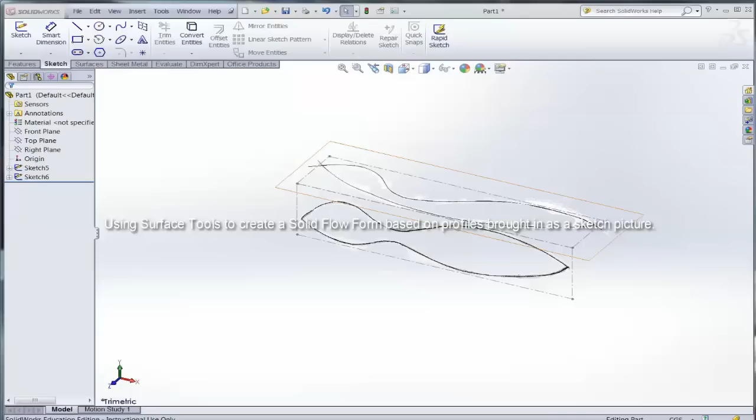Alright, we're going to use the surface tools to create a solid flow form based on our sketch pictures that we've brought in. Here are our two sketch pictures we did in our last video, and I'm going to start a new sketch on a plane that's in the same area as the sketch picture I brought in, but it's going to be separate from the sketch image.

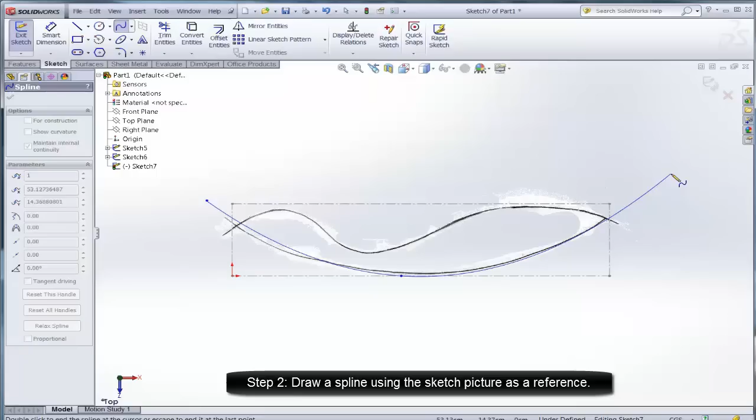I'm starting a whole new sketch for this spline, which I'm going to lay down right on top of the form, using that drawn image underneath to help me place this spline accordingly. I'm going to move it around and adjust it, so if you've been working out these forms or proportions in Sketch, you don't have to redo all of that work. In SolidWorks, you can base your lines on exactly what you've already drawn.

So I'm just pulling around the points and pushing the arrows to get this spline tool to line up the best that it can.

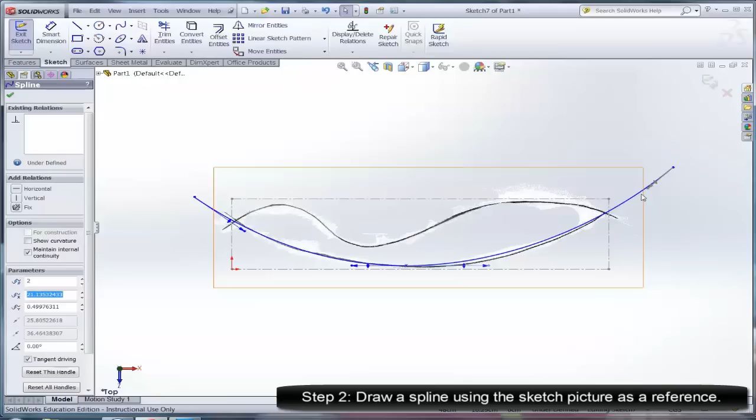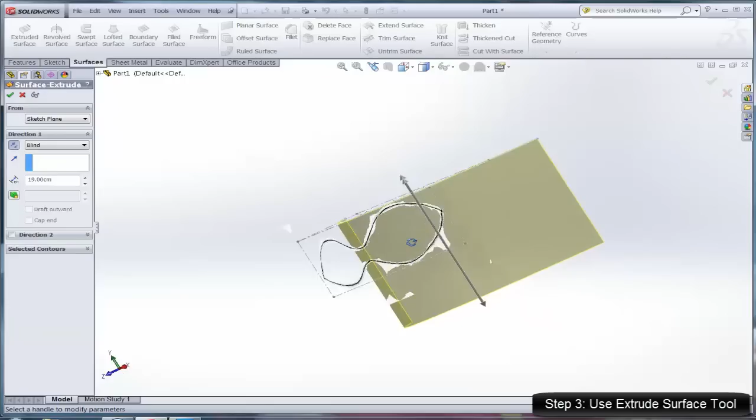When I'm totally happy with that curve, I'm going to save this sketch and get ready to extrude it. We'll get out of this and go to the surfaces menu, and use the extrude surface. Based on that single line, we're going to extrude a single surface in the object. The surface is infinitely thin, but it's sitting right on the profile that I've drawn and is pushed out.

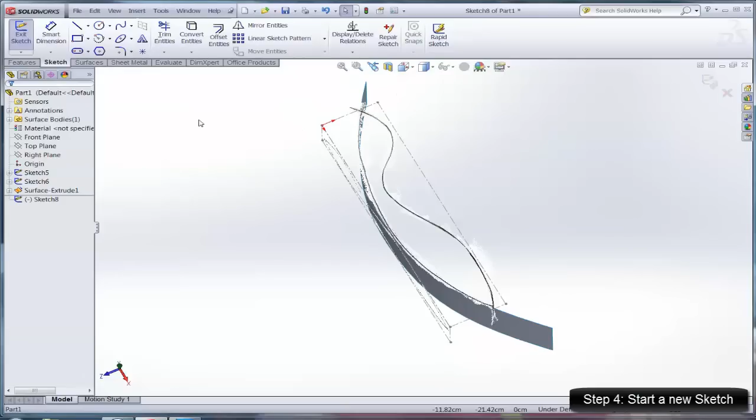Now I'm going to start a new sketch and draw the top part, or the other line on this profile, as a spline, and extrude it as a surface. I'm going to get normal to the sketch so it's easier to draw, get up to my spline tool, and start laying down the points of the spline.

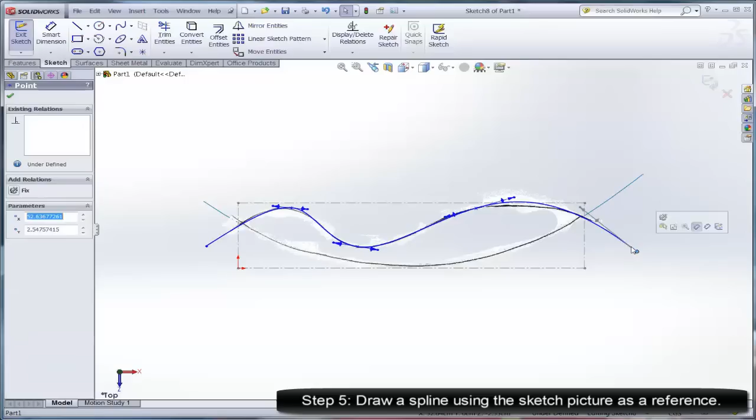I'm going to fast forward just a little bit through pulling this curve into shape. There's a coincident marker there that kind of was hooking it to the edge of my box, so I took that off. I'm still just kind of pushing it around until the shape of that curve is just what I want.

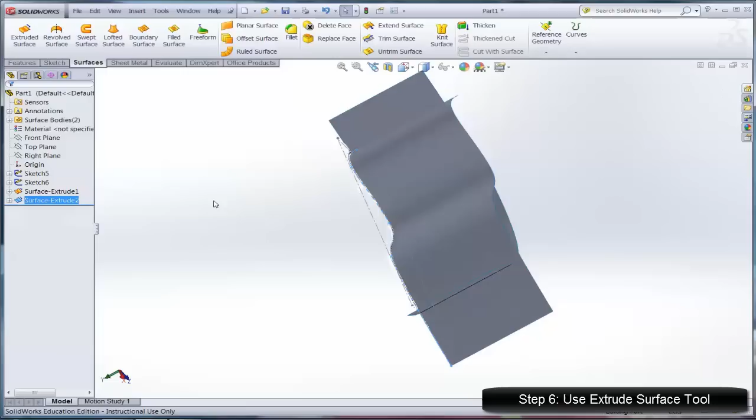When that's done, I've saved the sketch. I'm going to go back up to the surfaces menu and extrude the surface, pulling it in the other direction, and when it's about the right length, I'm going to save that as well. So now I have these two surfaces that mimic that sketch I brought in.

I'm going to hide that first sketch just so the screen clears up a little bit, and get ready to use the surface trim tool, trimming off the edges that I don't need.

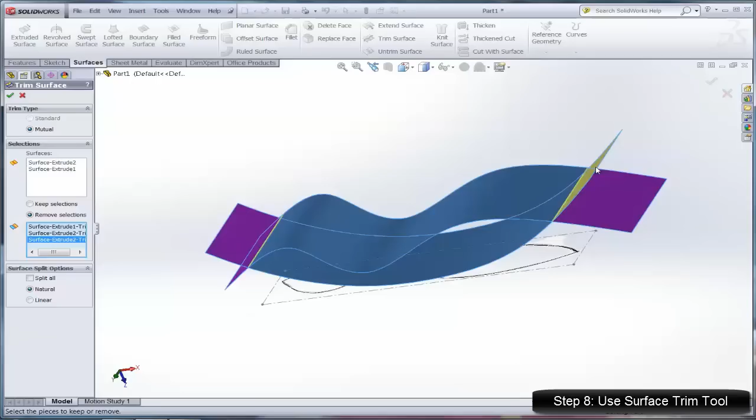At first I select the two surfaces that are going to cut. I make sure remove selections is on, and now I'm selecting all the trim parts that I want to remove from the object. I went ahead and did it now so that it's a little bit easier to see my form as I'm building the other sides of it.

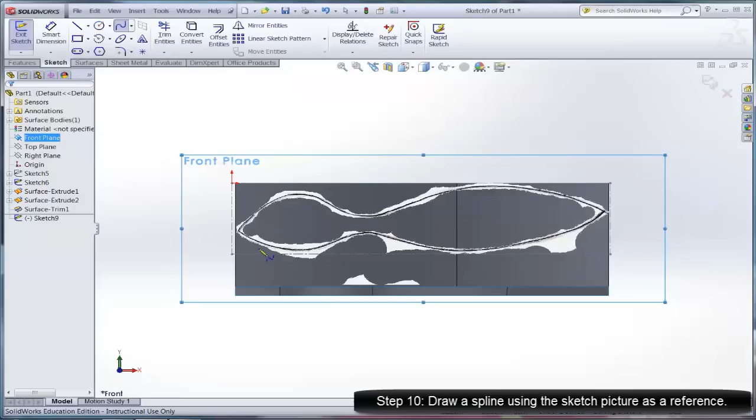Now I'm going to go back and start a new sketch, using the other profiles that I imported as a sketch picture. I'm going to get normal to it, start with my spline tool, and lay down the spline for this sketch.

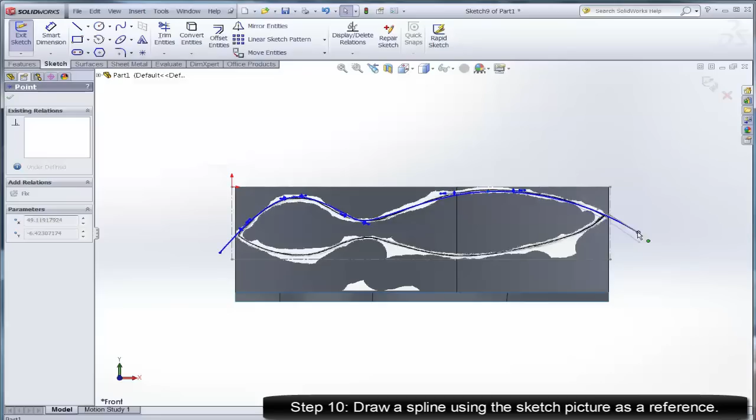Now I'll just sort of try and quickly work through pulling this spline into shape. Again, you can see I accidentally grabbed a little coincident marker there on the end of my surface, so I'm going to take that off so I can more easily move the spline around. I'll save it.

And extrude it again with the surface, asking me to pick that sketch that I want to extrude. I'm going to change the direction, and I feel good about that, so I'll keep it.

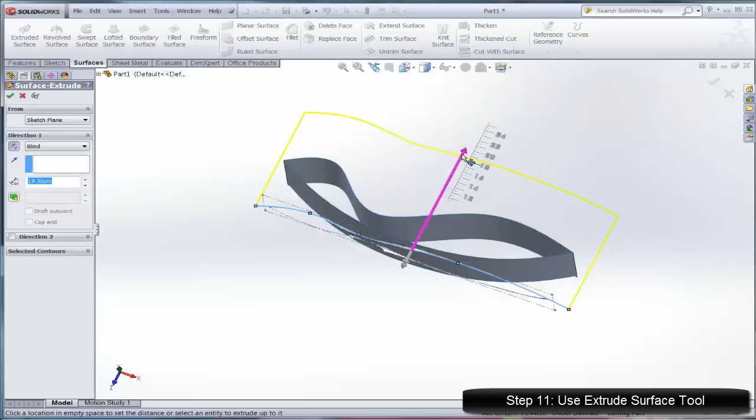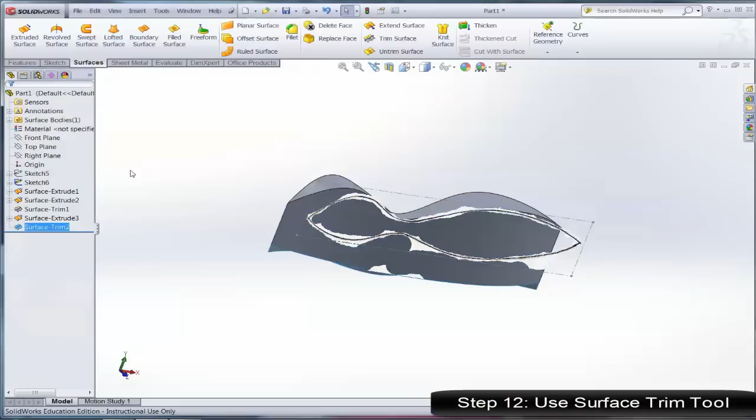Then I'm going to trim off the edges. So go back to my trim surface. I'm going to select the two surfaces that I want to use to cut each other, make sure I select what I want to remove, and remove those two edges, and that's going to build one side of my object.

Now I'm ready to lay down my final spline. I'm going to start a new sketch, my very last one, based on that same plane where my sketch picture is.

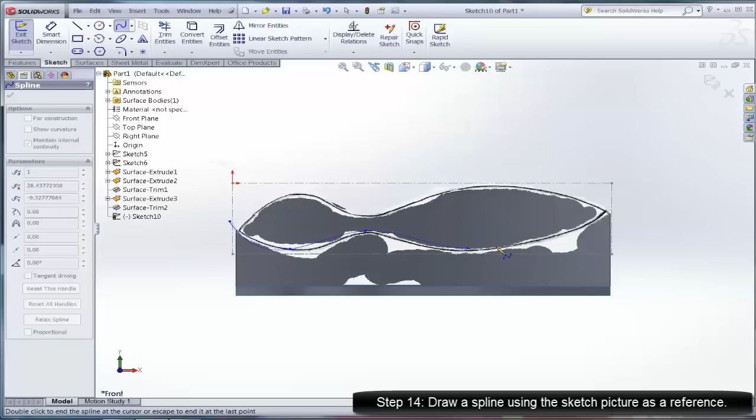I'm going to get normal to it so I can see it, and lay down my last spline, trying to avoid those coincident markers that were keeping me from pulling the object into shape. You can see I'm really overbuilding these splines so it fully crosses and intersects with the shape below.

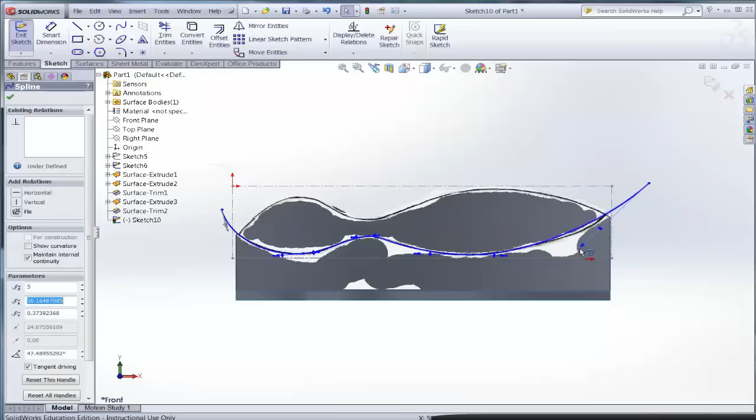We'll do just a little bit more work on this one, and then we'll extrude it. Okay, I'll keep that. Now I'm going to go back to my surface tools, use the extrude surface, and pull it in the other direction.

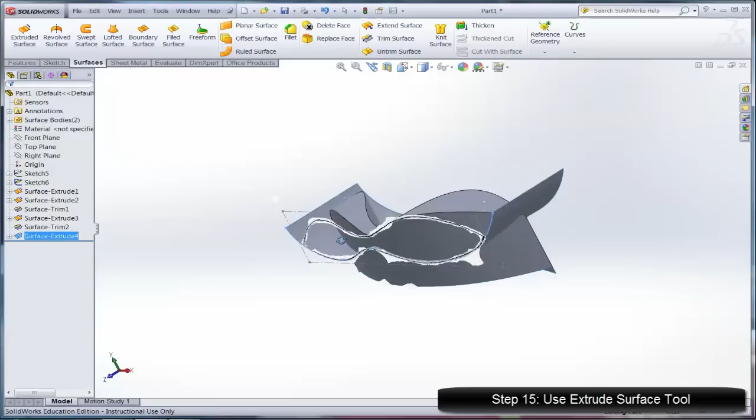I like the way that looks. I'm going to save it. Now I'm going to trim off this last face, trimming off the extras from around the face.

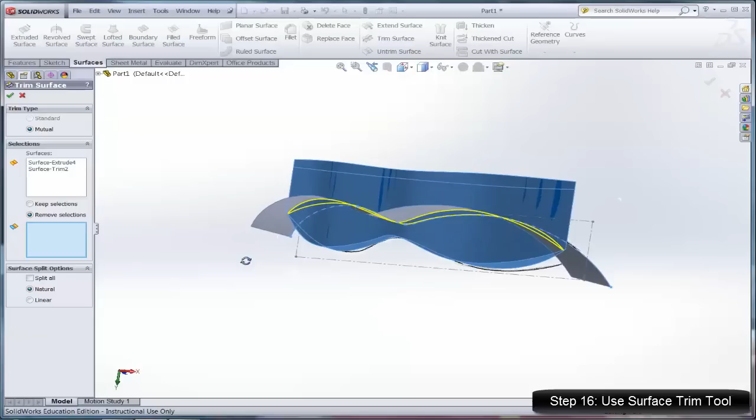Go to my trim surface, select all the surfaces that need to be added, and select my remove selection. So I'll pick that edge, and once the material is removed, I have my solid flow form.

The last thing I'm going to do is just hide that last sketch picture. From here, you're good to go.